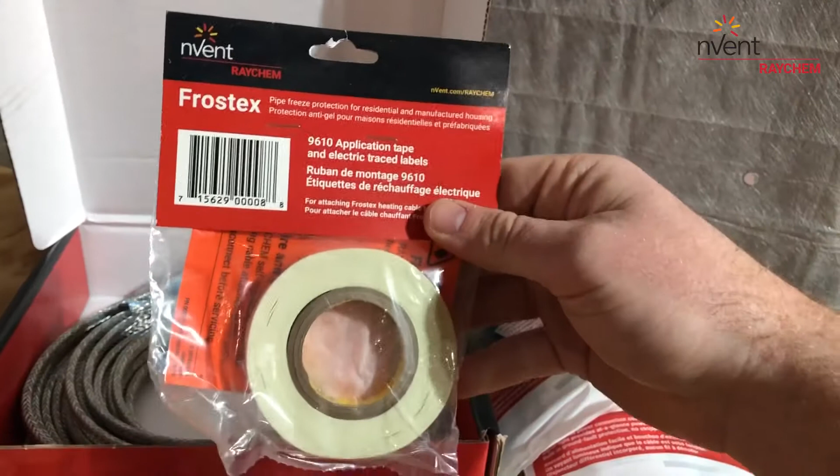We'll set that aside. And then we have the bulk spool here of the self-regulating heating cable that's Frostex. This cable will heat up and protect that pipe from freezing. The benefits of the RAYCHEM heating cable is that it can be cut to length depending on how much cable is needed. It can also be crossed and overlapped and will not burn out in that spot that it's crossed over. This is a unique technology that was invented by RAYCHEM.

So let's go ahead and dive into the installation diagram in order to see how much Frostex is needed and how much insulation to cover that system with per the particular pipe that we're going to be putting this system on. We want to make sure that we're referencing the installation guide found in the power connection kit in the Frostex bag, this right here. So let's move the tools out of the way and let's dig into this bag to see if we can find that.

All right, so now that we've opened up this bag, we can see that one of the items here is the gel-filled end seal. We do not need this right now, so let's set it off to the side for safekeeping. This part here is the actual 9800 power connection kit. We don't need it right now, so let's go ahead and set that off to the side with the end seal. This is a warning label that we're going to apply after the installation is over. Don't need this right now, so let's set it off to the side. This is what we were after, which is the installation guide for Frostex.

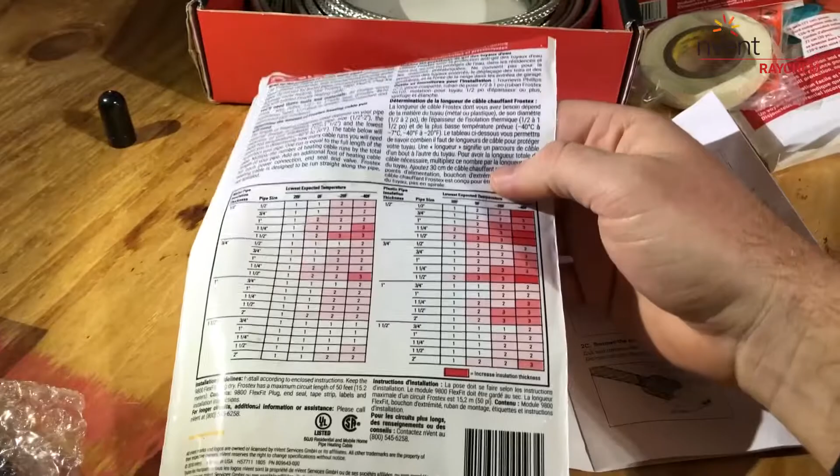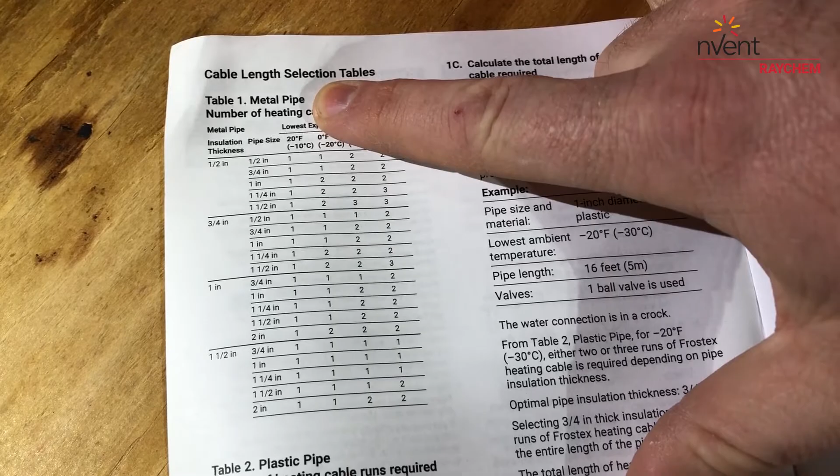Let's go ahead and open this up and go to the chart. So it's not the first page, but it's the second page. And this is the chart that we're looking for. This chart can also be found on the back side of the bag. But for right now, we're going to use the chart that's in the installation guide. The first table that you can see here is for metal pipes. The second table is for plastic pipes. And you can see the different listings here that correspond with the 2 different types of pipe material.

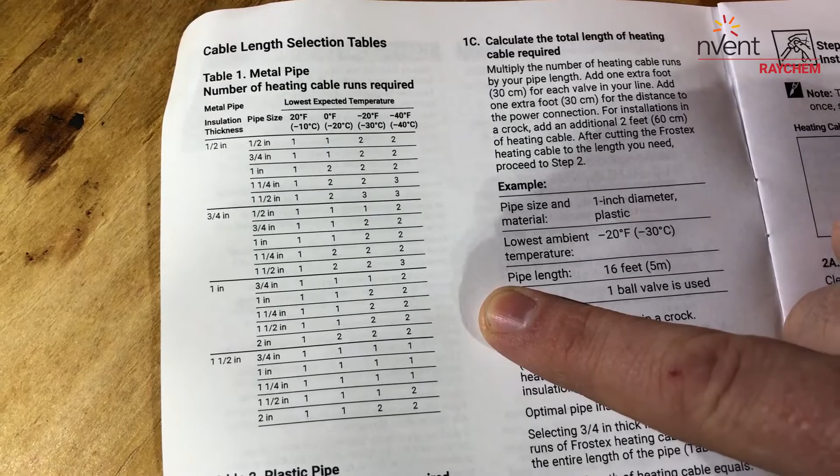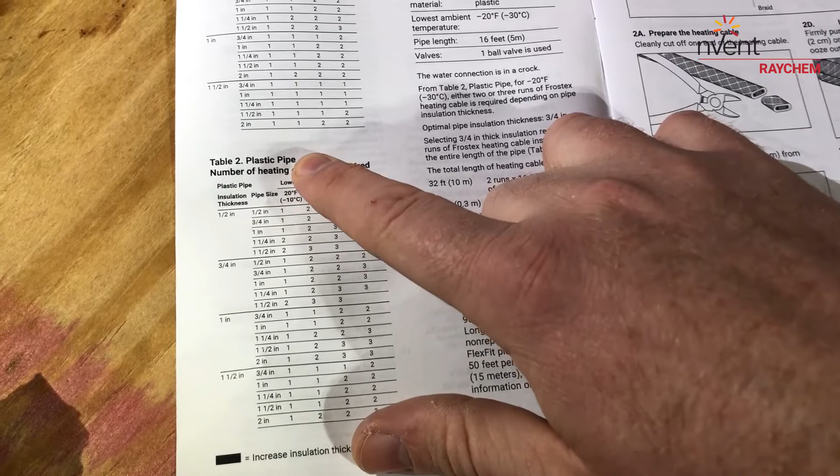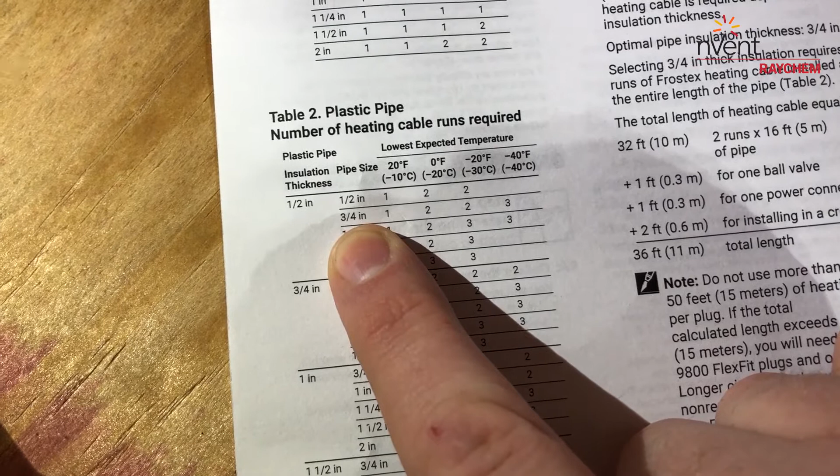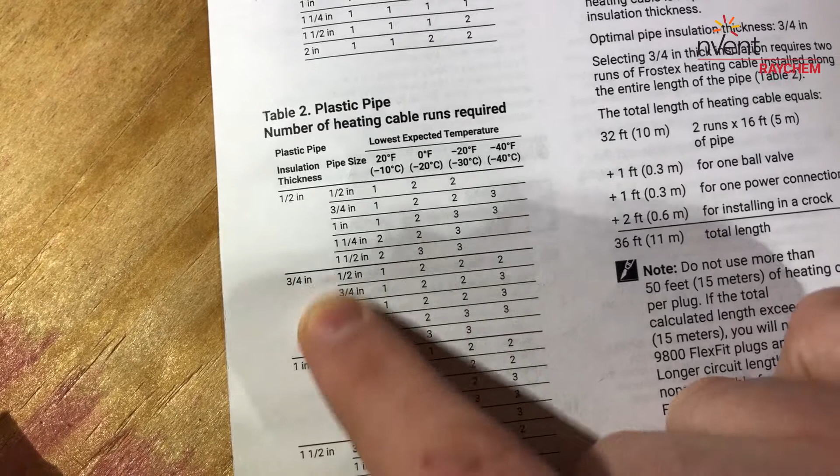The pipe that we will be installing the Frostex heating system on today is 3/4 inch PVC, which happens to fall under the plastic pipe guide. So we're going to the pipe size that is 3/4 of an inch under the plastic pipe. Now when we go to that section, we notice that we have a couple more choices to talk about because we have 3/4 down here and we have 3/4 down here. The number that's over to the left-hand side talks about the insulation, which you're going to wrap around the system after the cable's been installed.

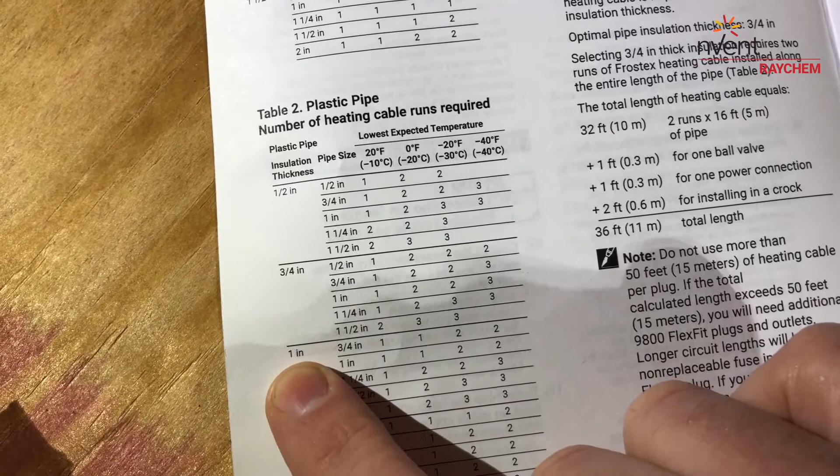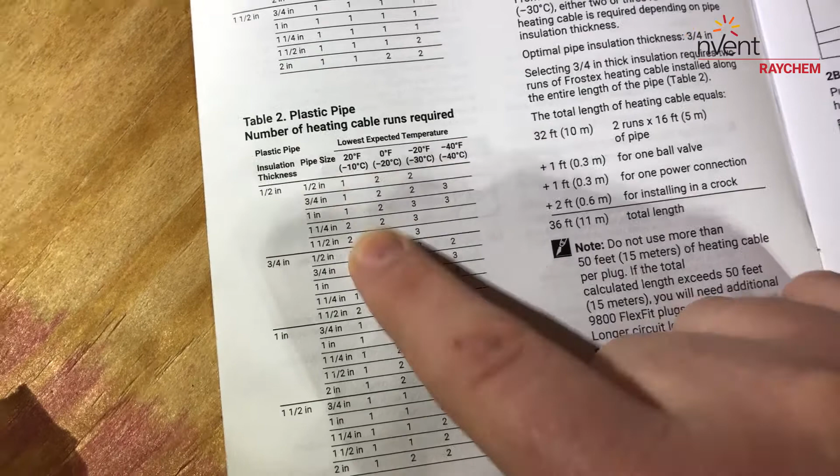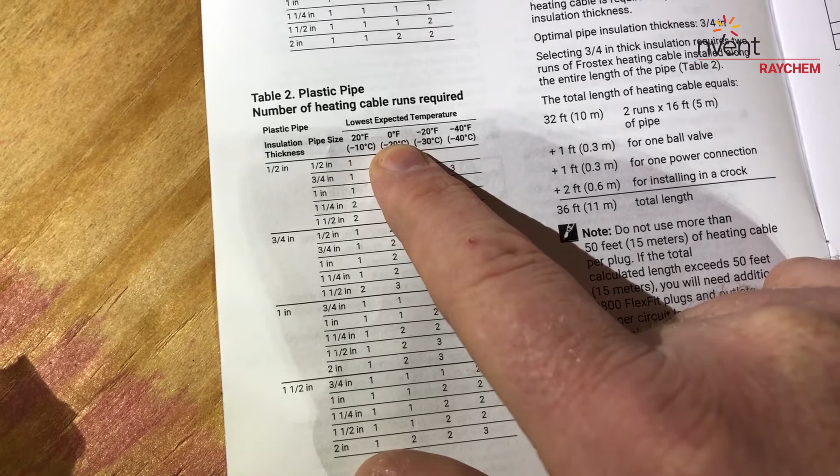And this is the insulation thickness, 1/2 inch, 3/4, or 1 inch. Then we correspond that to the lowest expected temperature that this system is going to be turned on or operating in. The particular application that we're going to be installing the 3/4 inch PVC pipe is for a hose bib in an uninsulated garage, which means that I probably will not see 0 degree F or negative 20 degree F. I more than likely will only ever see 20 to 30 degrees Fahrenheit, but I want to make sure that that pipe does not freeze.

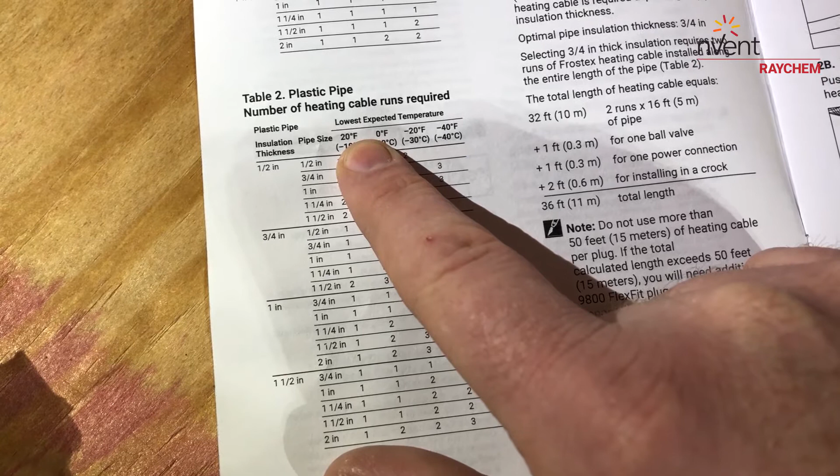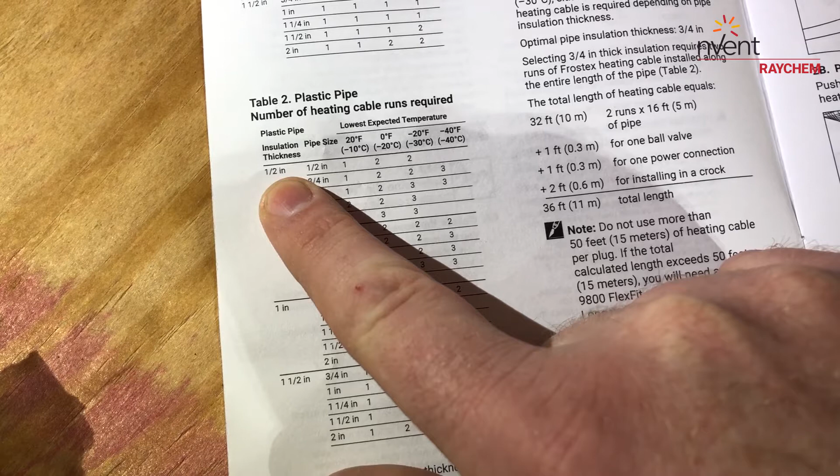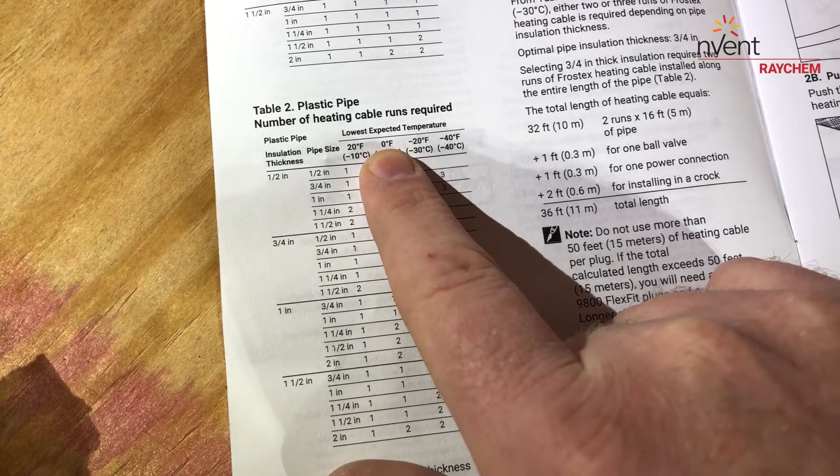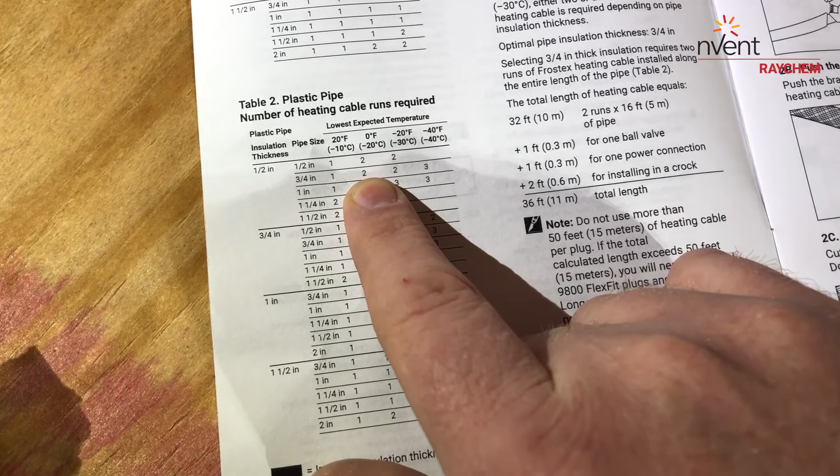So I'm going to reference the 20 degree Fahrenheit number, and I'm going to go to the 3/4 inch PVC pipe, and I notice that I only need 1 run of heating cable if I use a 1/2 inch of insulation. That's how we look at this. Now, if we were to go up to 0 degrees and say that this ambient temperature of my garage were to drop to 0 degrees Fahrenheit, at a 3/4 inch PVC pipe with only 1/2 inch insulation, I would need 2 runs of Frostex. This is a very good detail to look at and make sure that you're applying the correct amount of heating cable.

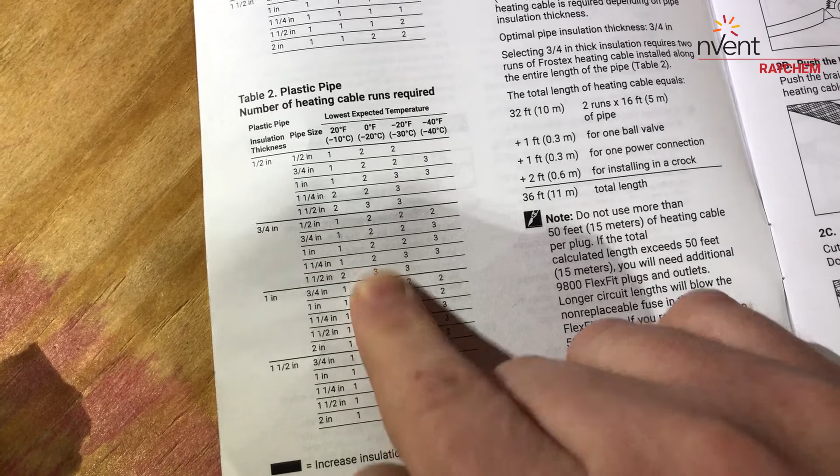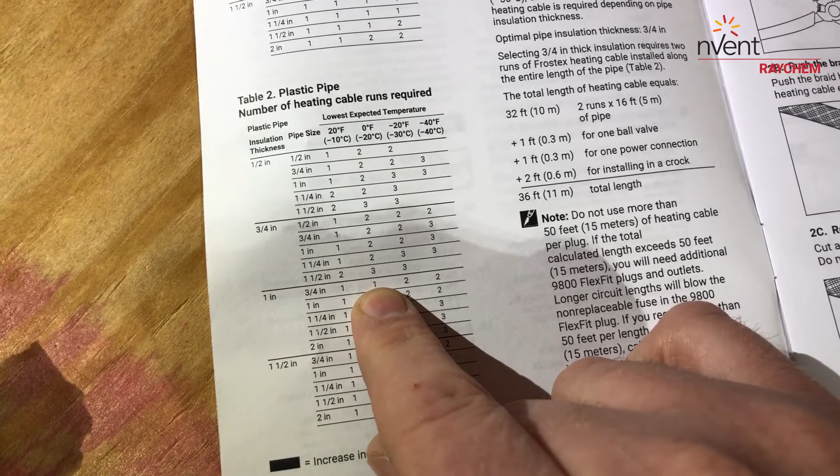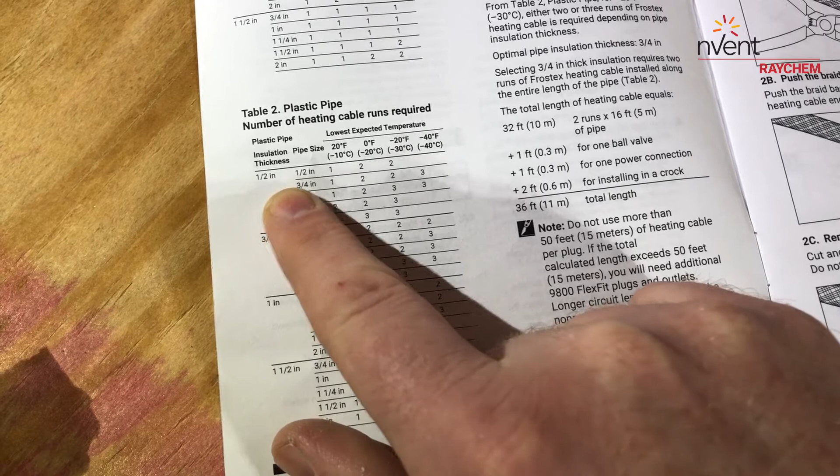Now, as we go down this list, if you use 3/4 inch, it'd still be 2. Now, if we come all the way down here, if we had an expected ambient temperature of 0 degrees Fahrenheit, and we use 1 inch thick insulation with a 3/4 inch PVC, we could still get away with 1 run of heating cable. That's not going to be the case for our particular application, where we're going to be installing this Frostex in an unheated garage inside, where I'm going to be looking at 20 degrees Fahrenheit. So we could go with 1/2 inch insulation with 1 run, or 3/4 inch insulation thickness with 1 run, or 1 inch thick insulation with 3/4 inch pipe with 1 run.

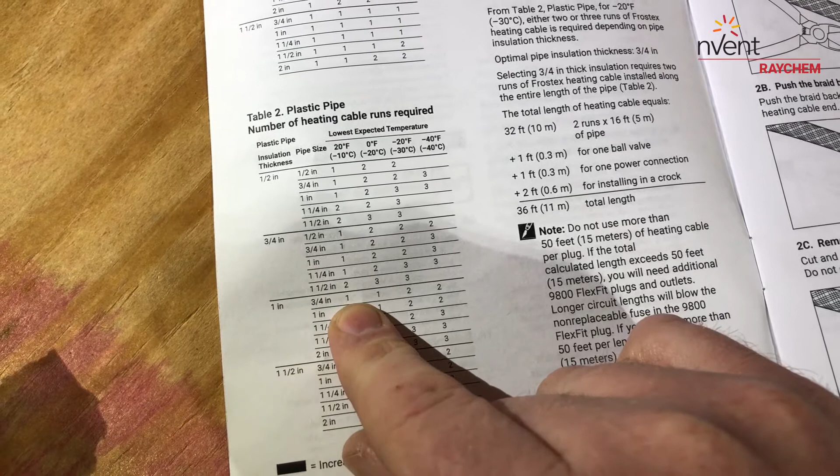And we're now ready to use this side of the installation manual to go ahead and cut our cable and get it ready for the power connection kit and the end seal. So let's move this stuff aside, and let's take a look at the self-regulating heating cable from RAYCHEM. Now, this cable right here, covered in this grounding braiding jacket, it already looks like the ends are terminated. These ends are terminated to test the cable and to make sure that you get a high quality product out of the box. However, these cable ends are not ready for our installation. We want to make sure that we're cutting this cable to length, and that we're going to cut this flush with the side cutters, which is this tool here, in order to make sure that it's ready for either the end seal or the 9800 power connection kit.

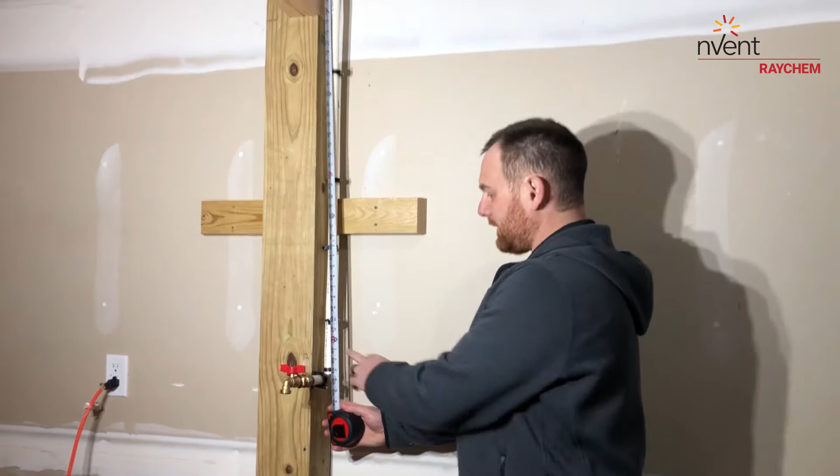All right, so let's take this heating cable, and we're going to go out and measure the length of our pipe and make sure that we have enough heating cable here in this box to be able to do that job. So let's go ahead and measure this so we can figure out how much Frostex we're going to need. Well, down to there's about 4 feet, and then if we were to round this corner, you're looking at about 5 feet to 6 feet of heating cable. Please note that a max run of Frostex heating cable is 50 feet in length. We only need about 6 feet here, so we are perfectly good to be able to do this install.

The next tip is that when you install the RAYCHEM 9800 FlexFit plug, you want to make sure that this cord is long enough to be able to reach to power. And what I mean by power is you need to have a 120 volt outlet that is available to be able to plug this system into. Usually, this item here would be zip tied to the pipe after the insulation is put on, or I think with this insulation we might be zip tying it here, and then this would be long enough to be able to plug into the 120 volt outlet. That's key to think forward and plan with your 9800 power connection kit.

Now that we know the length and we've figured out that we have available power to us, now we can go ahead and start putting the Frostex heating cable on to the pipe itself. Now's the time to install the end seal on the Frostex heating cable. We're going to take our side cutters that we've used before, and we're going to cut this cable flush, like that. And as we zoom in here, you're going to notice that we need to push back this grounding braid on the end of the cable about 1 inch.

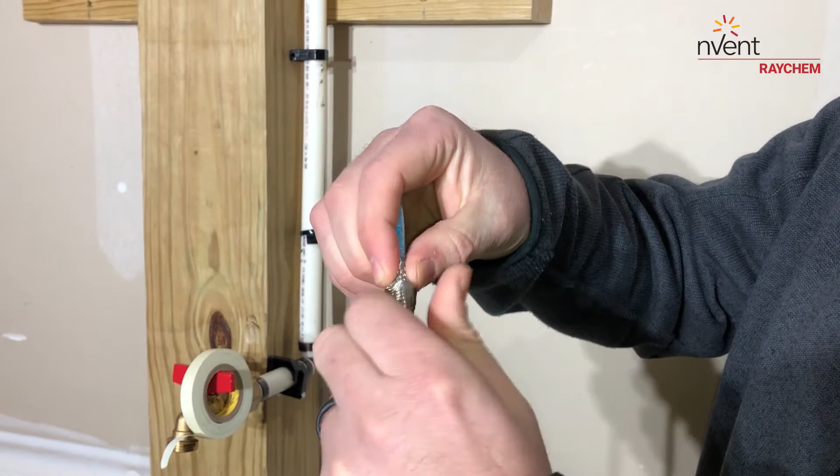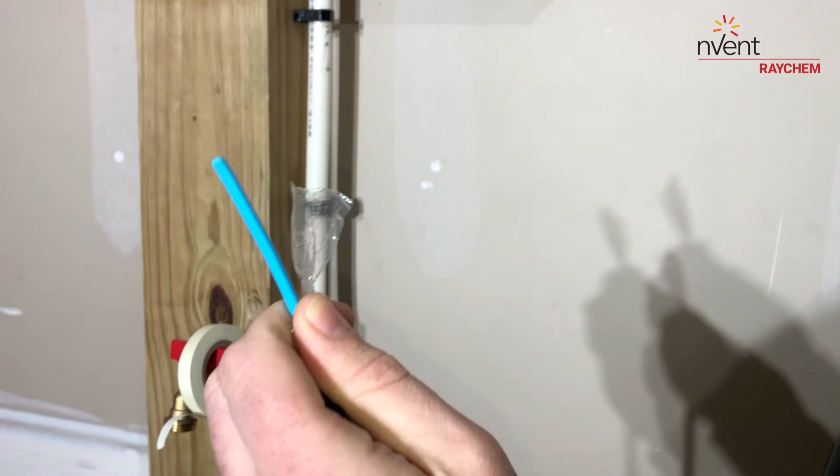Then we remove this plastic jacket on the outer side of this blue heating cable. And usually I find the best way to cut this off is just to twist this plastic jacket to give it a little bit more body so that you can cut it off with your side cutters. Now that we have the Frostex heating cable exposed, we can go ahead and install the end seal. This end seal is filled with gel, and it's a one and done kind of installation.

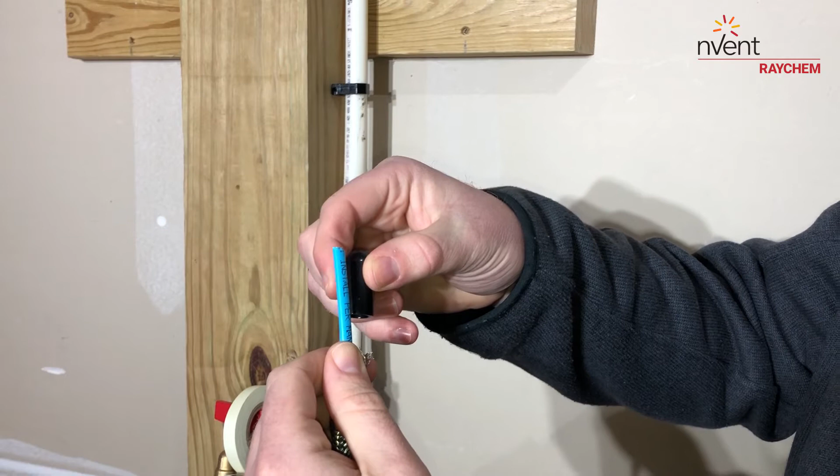So what you want to do is firmly grab onto the Frostex heating cable and go ahead and push this end seal firmly down until it bottoms out. So let's go ahead and do that. Okay, the cable bottomed out, and that makes a really nice, strong and watertight connection to the Frostex heating cable.

Now that we have our end seal installed on the end of the Frostex heating cable, we want to be able to push this grounding braid back up and put it up against the end of this end seal. We want to go ahead and clean up any frayed grounding braid. You can wrap it around a little bit so that you can firmly push this up to the end of the end seal. We're going to be wrapping this amount right here with some fiberglass application tape. I'm going to go ahead and take that right now and start about right there.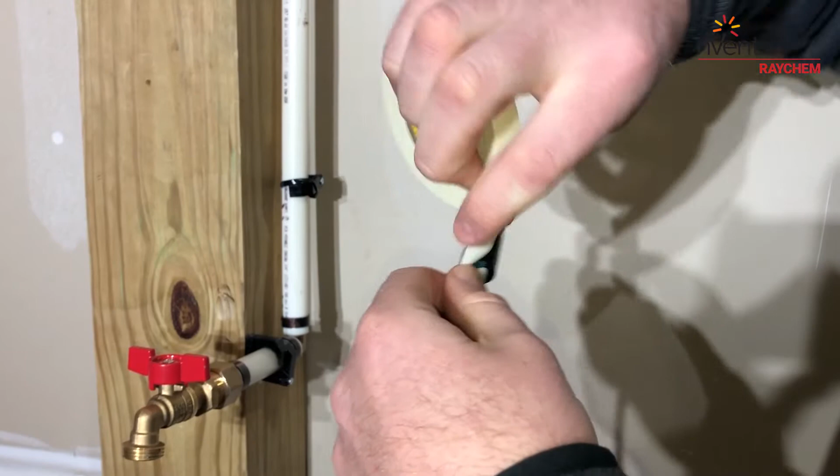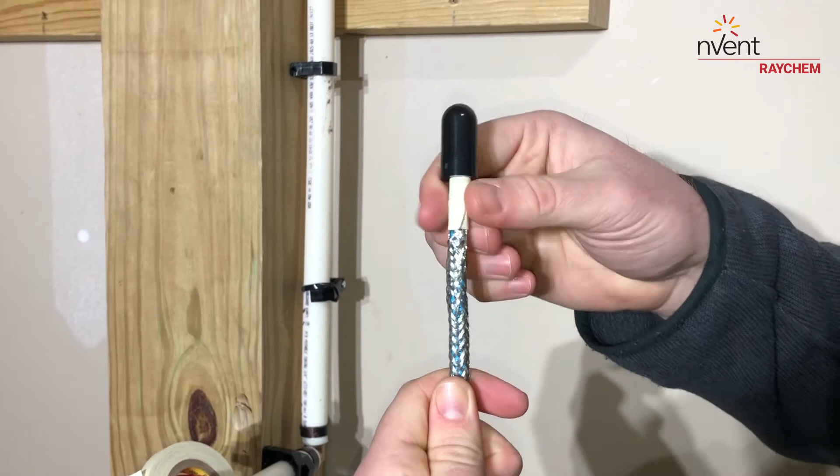And there we have the end seal installed with fiberglass application tape on the end, and now we are ready to go ahead and install this on the pipe up at the top. This is that end seal that we had already pre-terminated, and we're ready to go ahead and install this on the pipe. Now this amount of heating cable is the full amount.

So as we had talked about before, we would only need about 6 feet. So I'm 6 foot tall. What I'm going to do right now is I'm going to cut this spool off and save it because I can use this on another job. And that's the beauty of having the FrostEx trade pack, is it comes with 2 power connections and 50 feet of cable, so you could use 6 feet here and then you could do another job with another 10 or 15 feet. So I'm going to cut this off so we can use it on a different job.

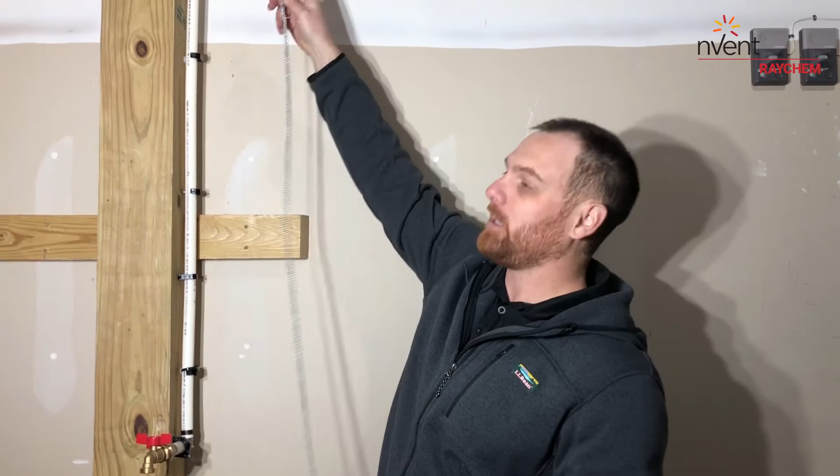So to cut that off we're going to use those side cutters that we've used before, and we're going to cut this cable flush off. All right, now that that's cut off, we are going to use this to install onto the 3/4 inch PVC pipe. Now you're going to start with the end seal on this job going up, because you want to then be able to install the power connection kit on this side when it's going to be closer to power.

So how we're going to install this on the pipe itself is we're going to be using that fiberglass tape that we had used before on that end seal. And here's that roll of fiberglass tape. So usually what I like to do is I like to get a couple pieces started on that job so I'm not messing around with the full spool. So I'm just going to get a couple pieces ready. And then this will all start to make sense as we work our way down the pipe.

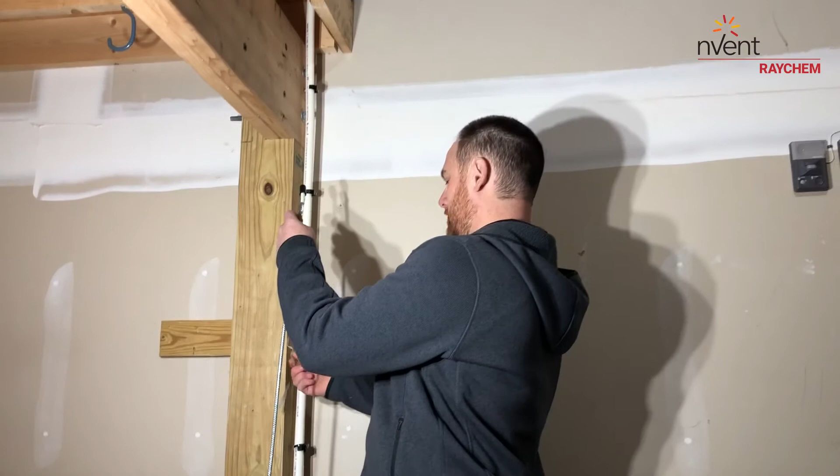All right, so now we're going to go on up. End seal first. Take some fiberglass tape. And we're going to go up and we're just wrapping this right around the pipe.

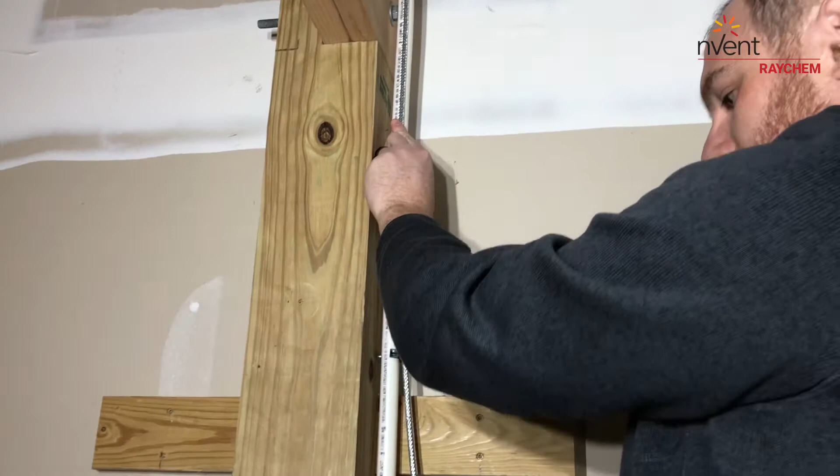All right. Can make it nice and clean. Come on down. As you can see here, we're just taking our fiberglass tape, wrapping it right around this cable. Now I need a little bit more tape.

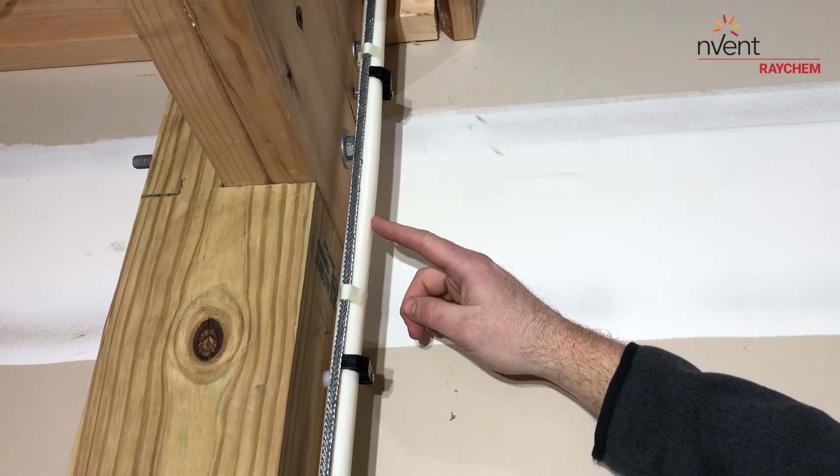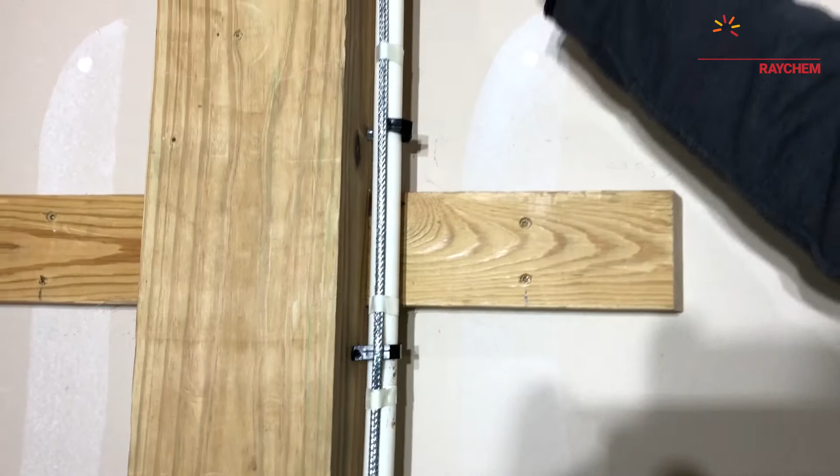Okay, here is the 3/4 inch PVC pipe that is heat traced with RAYCHEM FrostEx heating cable. Now we started all the way up there with the end seal, and we're working all the way down this pipe, securing it to the 3/4 inch PVC with our application tape. We're doing that about every 12 inches all the way down this pipe. You keep it nice and straight and clean, and this is one run of FrostEx, and that's all we need for this particular application.

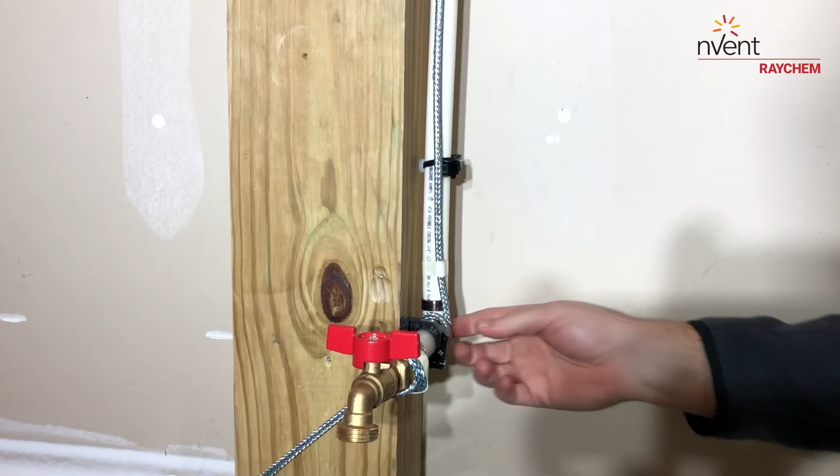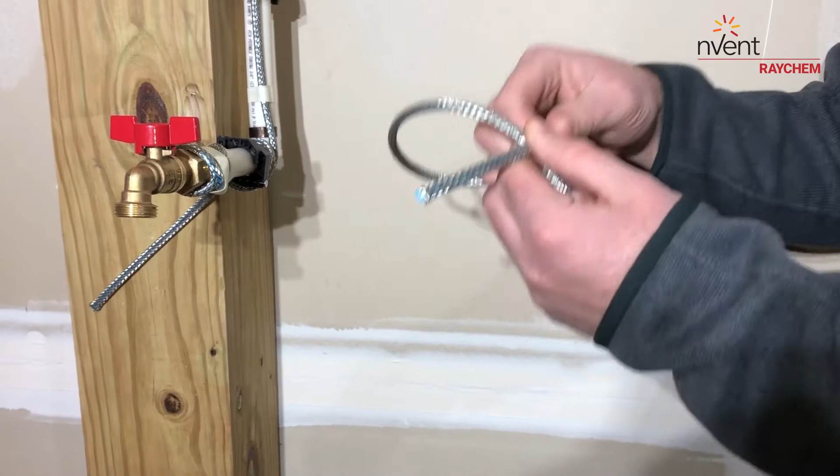We come down here and notice that we have a brass fitting here, and we have some brass fittings here that may be colder than the actual plastic. So to overcome that, what we can do is we looped around with the FrostEx, and then we came through here and then crisscrossed over. The beauty of self-regulating cable is that it can overlap and also be cut to length for that particular application.

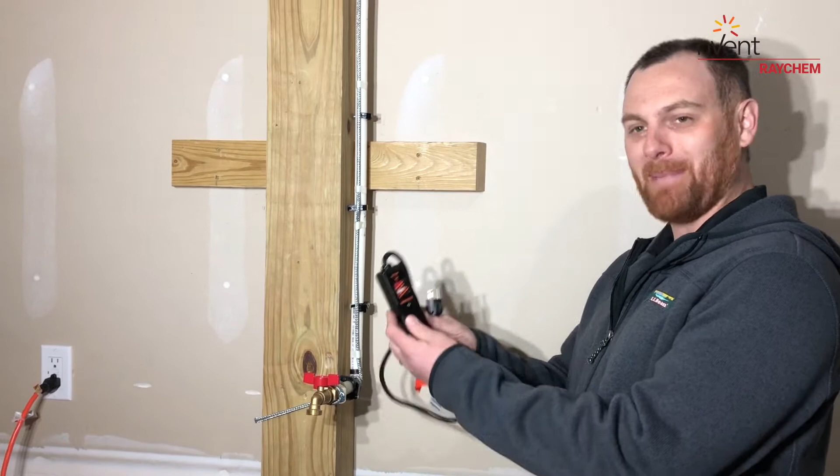All right, what I have here in my hand is the 9800 power connection kit, which is the flex fit plug for FrostEx. We want to make sure that we have power available with an outlet, that we do, and it's close enough to where we're going to be able to mount this. And why we want to be able to have access to this is there's going to be an indicator light showing you that there's power going to your FrostEx heating cable and it's on.

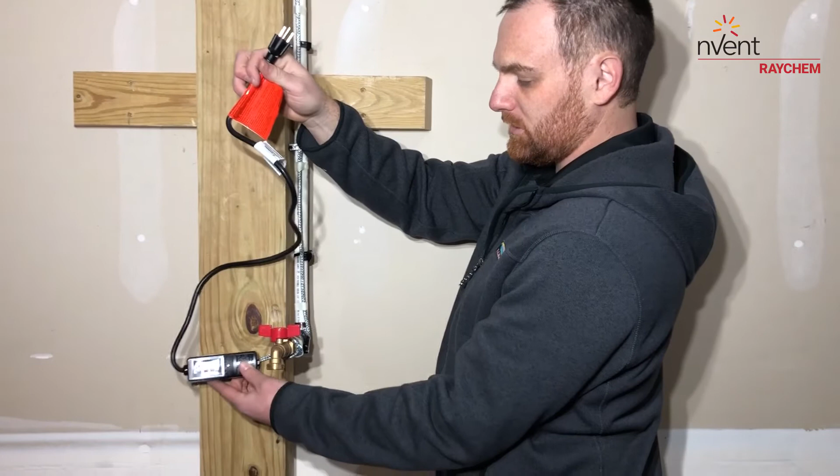And there's also going to be a test and reset button that you're going to want to be able to have access to. So where we're going to be mounting this is somewhere in this region where the end of this cable is, that's close to our application of the pipe, and then still long enough to be able to get over to power. So that's where we're going to be mounting that.

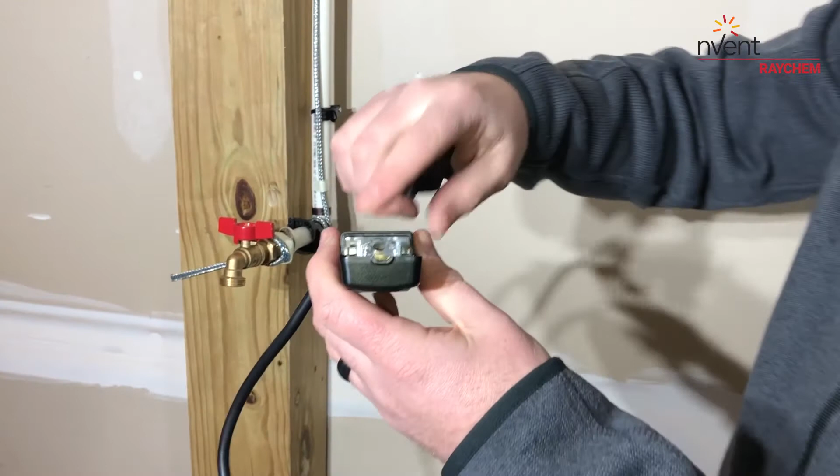So on the back side, we want to get into this 9800 power connection kit, and inside here, you'll notice that there's a channel to accept the heat trace cable. We prep our FrostEx heating cable to be able to go into that channel. So we're going to do that now. So as we move over to this particular heating cable, I'm going to set this plug aside.

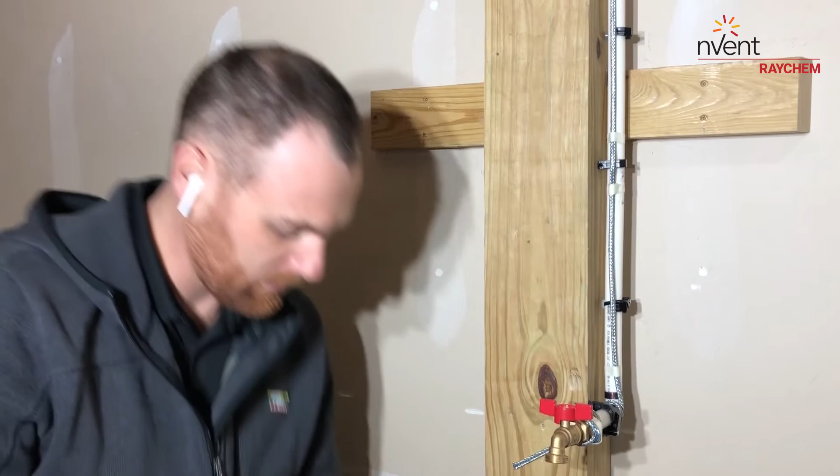I'm going to go ahead and, just taking our side cutters as before, we're going to get this nice and flush cut, okay? And we're going to push this braid back about that 3/4 of an inch. Now note in the installation instructions, you do not have to remove this plastic. I do find it easier though if you do.

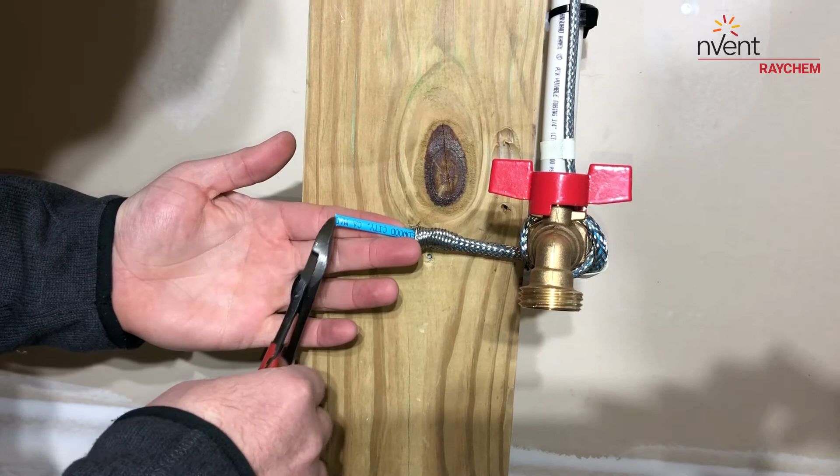Once again, go ahead and double back on this so there's a little bit more body with that so that you can be able to cut it off. Then, I usually like to make this blue as flush as possible when you do trim it off. That looks good there.

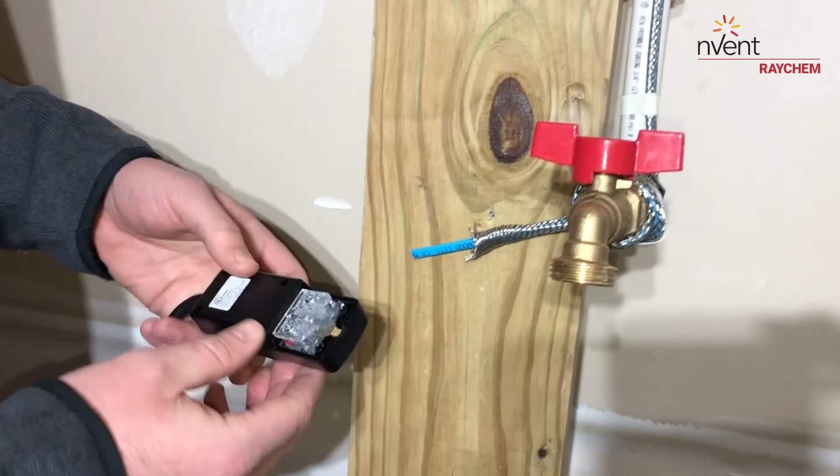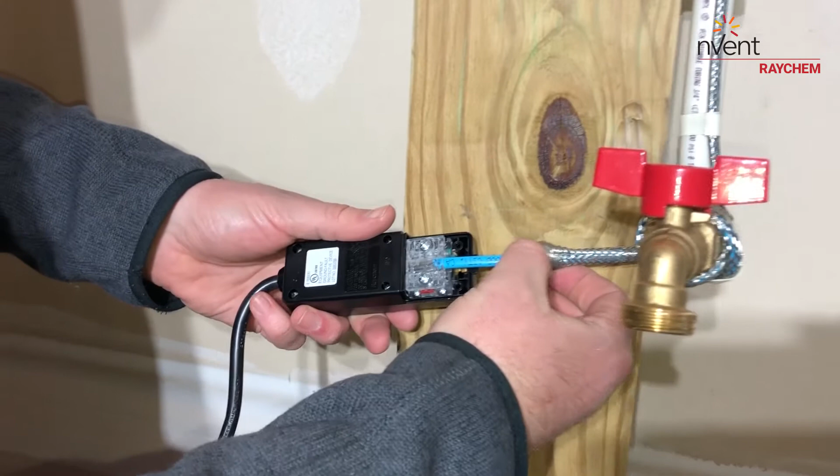All right, so now that we have our 9800 plug ready to accept this heating cable, we want to get it all nice and lined up to be able to go into this plug. And what you're going to do is you're going to push it till it bottoms out and then hold that while you take your number 2 Phillips screwdriver and start to screw this down.

So we still got some movement on this side, so we're just going back and forth until we feel that it has a little bit more resistance on it. It's getting pretty tight on that bottom screw, so let's go back up top. And this is just a feel in your hand here as to how tight. Right now, it's pretty tight on both sides, so that's good.

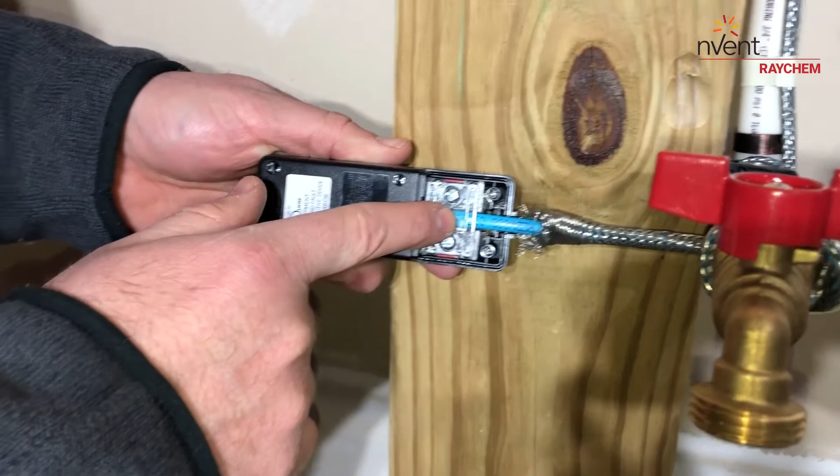We are installed, and that 120 volt power will be able to go. Now it's made connection to those bus wires inside this heating cable so that we will send 120 volts into this cable. It will self-regulate and produce heat all the way along this pipe.

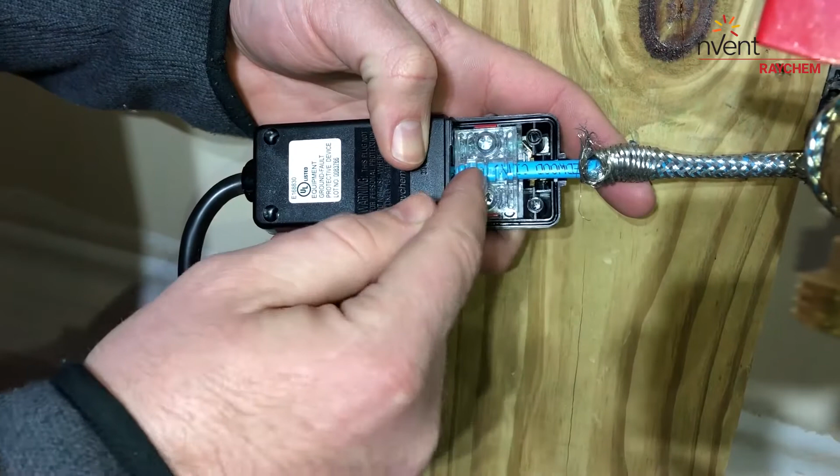So with this grounding braid that we've worked on before, we want to make sure that you don't have any residual wire or individual strands that could potentially, like that little guy there, he could have gotten inside this connection and wreaked havoc on that. So you do not want any of those individual strands getting in your way. So what I like to do is just kind of string it around here, tuck it in, make it nice and tight. And you're now going to bring this braid in because we're going to make a mechanical connection to this grounding braid with the cover.

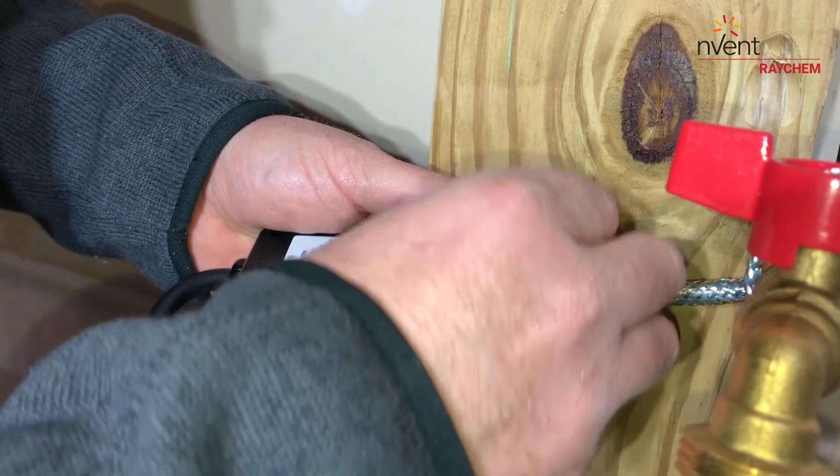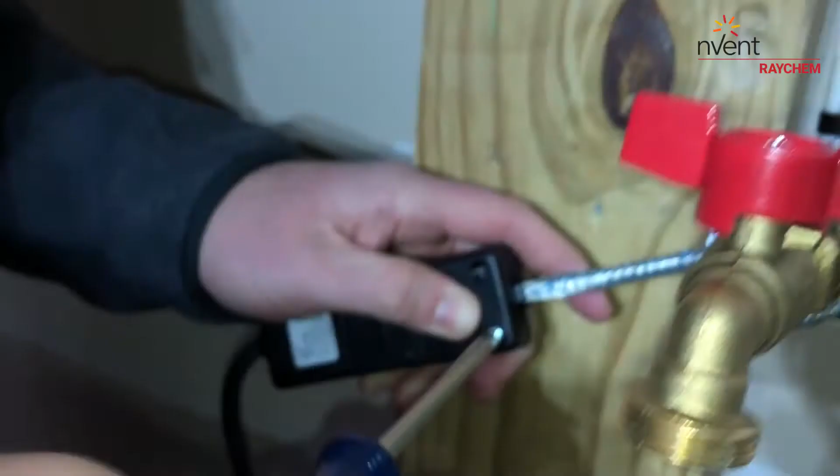Okay, and now that we have this cover back on top, we're going to take those screws from earlier that we had taken out, and I'm just going to drop them in there. And while you're still pressing firmly down onto the cover itself, you're going to screw these in. Now I'm just getting some tension on this screw so that it'll hold my cap in place.

But you're going to want to do the same thing we just did with terminating it to power on the FrostEx heating cable. And what that is, is going back and forth between those two screws a little bit at a time on each side. All right, we're nice and tight on that side. Perfectly tight on that side. So now what we have is a perfectly terminated FrostEx heating cable with a 9800 plug.

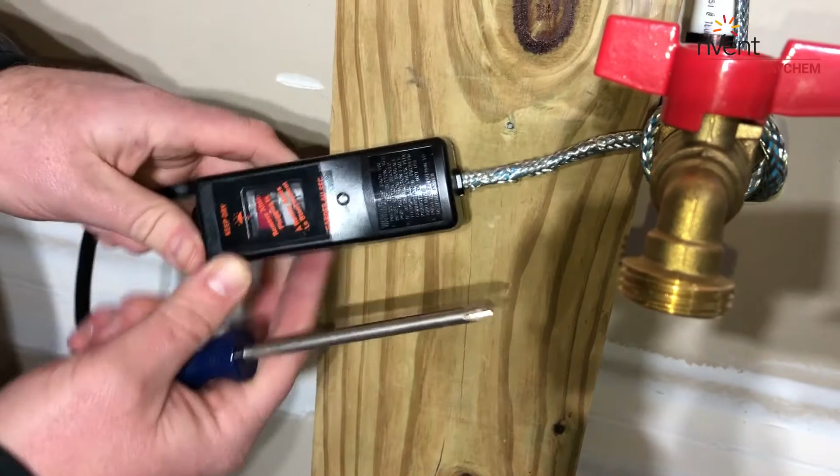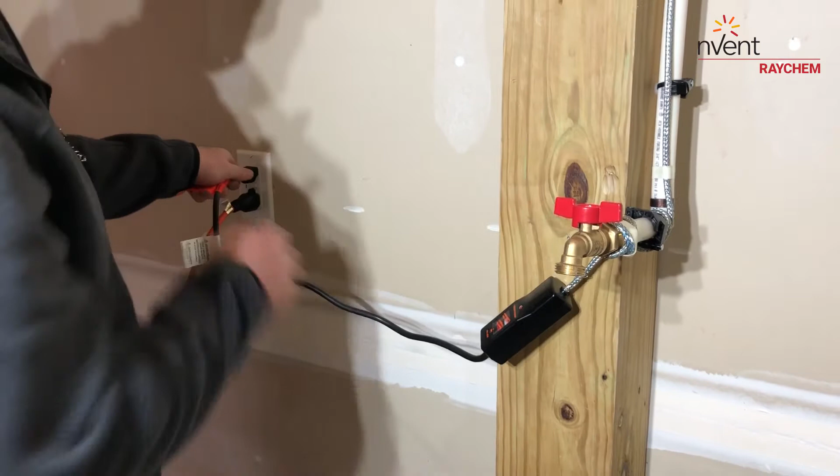So what we want to do is make sure, and like I said before, if we were to plug this in, which we can do live right now, we have an indicator light that's on saying that we've got heat going into this cable protecting that. So what we want to do right now is let's go ahead and unplug this. And we're going to now wrap this pipe in pipe insulation.

All right, we're nearing the end of our installation, so congratulations on getting this far. We just have a little bit more to go, and what we wanted to do was cover the entire installation with pipe insulation. So this pipe insulation can be purchased at any hardware store, and this thickness here we had already talked about in our installation guide on how thick that pipe insulation needs to be in order to be able to do this one run of FrostEx.

So I've wrapped this entire job in pipe insulation all the way down to where the fitting would be, where the water would come out, and then all the way up to that end seal where we had terminated in the beginning. So I have mounted the 9800 Flex Fit plug right here on this beam next to our application with some double-sided tape. You can use zip ties or you can use some fiberglass tape. And I personally thought that this would look the best in this particular application. It is still long enough to be able to reach the power. And right now, as you can see, this light is on and is heating this entire pipe.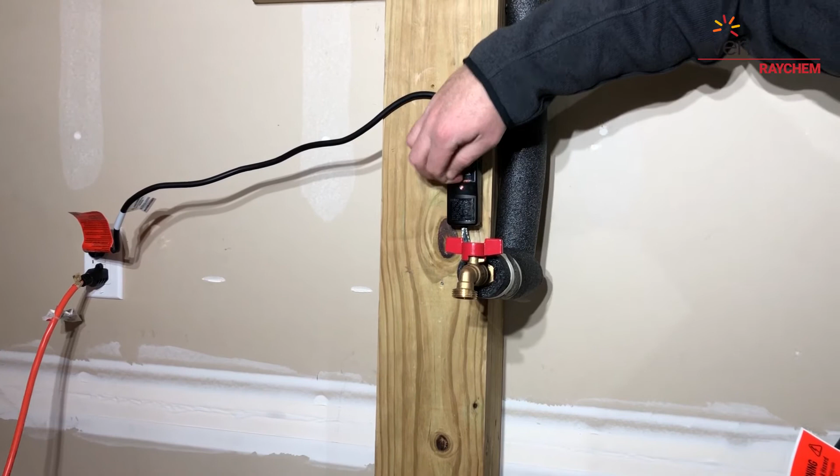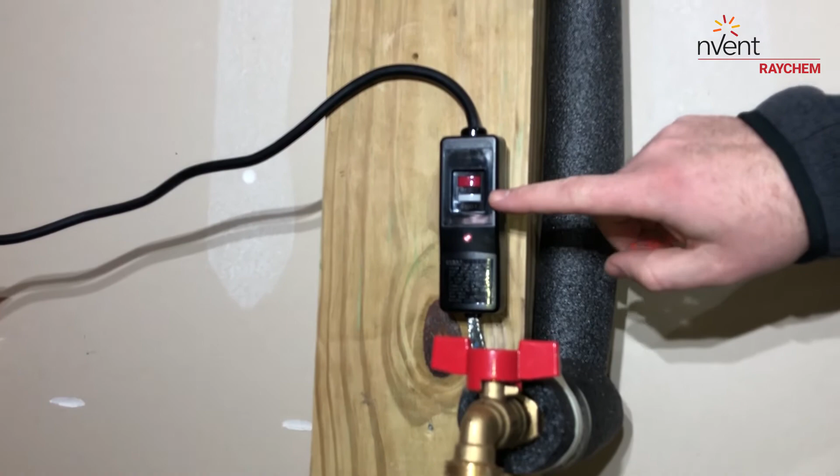So we do have a sticker here that we can remove. And I'm just grabbing this sticker. And as we remove this sticker, it gives you access to these buttons. These buttons are test and reset. So let's go ahead and trip that. That light's turned off and that button popped out, which means we no longer have power coming to protect our pipe. We want to hit that reset button. And now our light's illuminated again, saying that we have power coming through this plug and protecting our pipe.

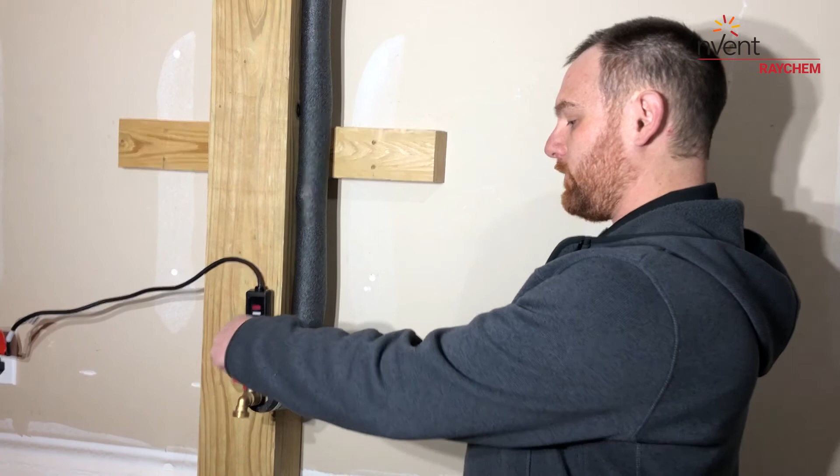So really the last thing to do, it's usually the first thing I like to do whenever I find a sticker, is take the sticker off and apply it to anything. But we had to be very patient, and this is the last thing we get to do, is apply the sticker. So we can go ahead and apply the sticker. I'm going to apply one right here. So if you were working at this nozzle, you would know that there is a heat trace cable underneath that pipe insulation. And that's what we're trying to let people know, that underneath this pipe insulation, there's a heated cable.

So that's it for installing Frostex.